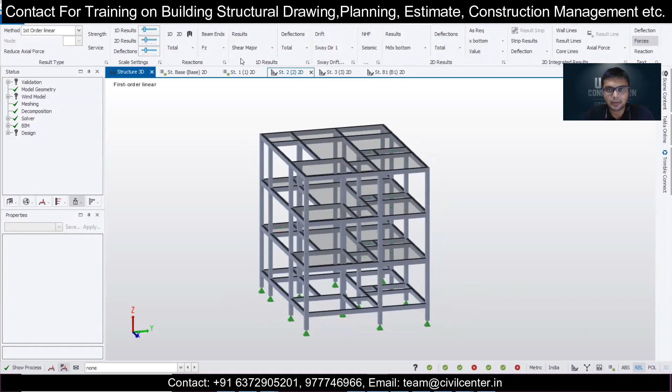So first of all, I'll just share my screen and show you this model in the Tekla Structural Designer software. We need to go here to the results view, and after going to the results view, we'll turn on the results and take any load combination or loads. So I'll just take a simple load combination of dead loads and live loads, let's say. And after taking that, you can turn on the shear and also the moment.

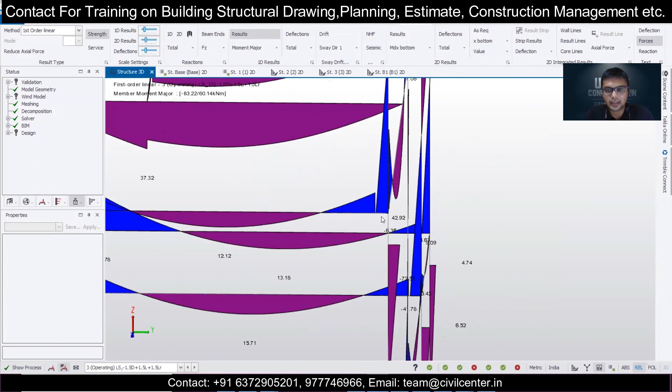So I'll go for the moment here. Let's see how the moment is acting on the beams. If you have studied the moment diagram for beams, you have also seen something similar. As you can see, at the top, the maximum moment is at the junction of the beam and columns, and it is a little bit more at the continuous end and a little bit less here, at the discontinuous end.

At the discontinuous end, the moment is a little bit less, and at the continuous end it is a little bit more in comparison. But overall, in general terms, you can say that in the top fiber of the beam, the moment is more near the supports, and in the bottom fiber of the beam, the moment is more at the center.

So before going deeper into that, we'll just learn some very simple logic for the lapping and give a very brief overview. Suppose the beam goes like this, and we have a few columns here. The bottom rebars of the beam will go like this, with a cover of at least 25 mm provided in beams, and the top reinforcement will go like this.

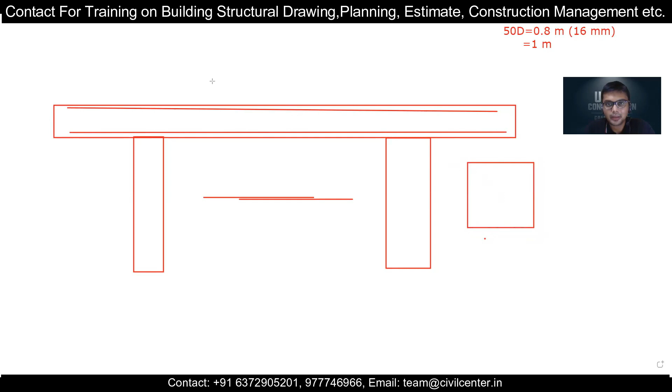So this is done in the columns, but in the case of your beams, we provide it like this. So this length is provided. Where to provide this? Let's discuss the top portion first, and before that, let me discuss the cross section. If you see the cross section, there are minimum 4 bars in a beam. There can be more. If we represent these 4 bars in this cross section, after the cover, it will be like this, and like this. I should have drawn the stirrups first.

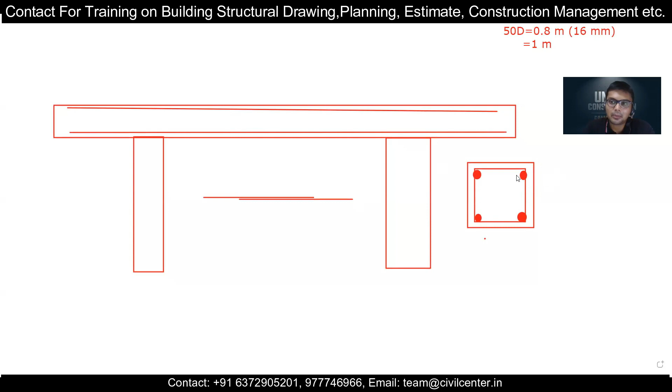So there are the stirrups like this. There is a stirrup like this, and there are the remaining components like this. This is the arrangement of the main reinforcement in our beams. If you have 4 number of reinforcement, 2 at the top and 2 at the bottom, the zone for your bars at the top, the bending moment diagram, which you have seen in this software, will tell you.

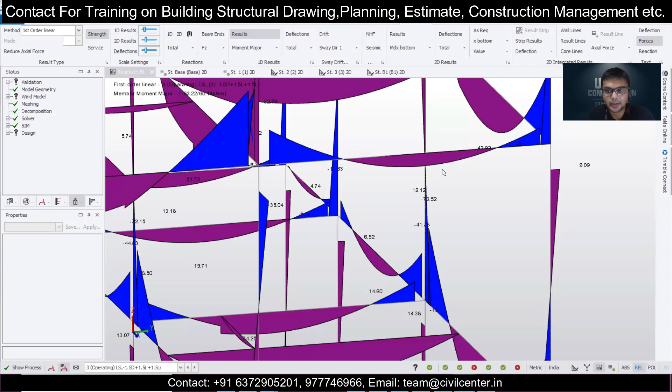I will just show you the screen. You can see here, this is the bending moment diagram. You can also see it from the load analysis view: right click and open the load analysis. You can see the entire bending moment diagram like this. Definitely it won't be at this end, it can be at this end.

In this span of L by 3, you can't provide the lapping. Lapping you can provide in this particular span. So here we mark it. This is the zone for the top reinforcement in which you can provide the lapping. If you have 4 bars, 2 bars lapping you can give here, and 2 bars you can give in the next span. Suppose this is the column, beam, and the next span ends here; the remaining 2 bars you can give in this portion. So you will have the staggered arrangement.

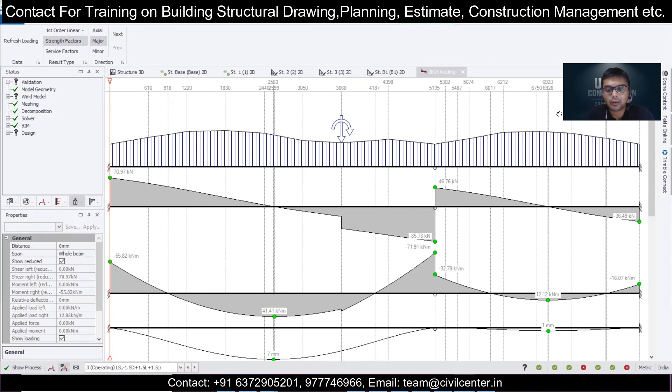So we shouldn't provide any lapping in the L by 2 region, because this is the most susceptible to moments. So we'll avoid this region. So how to avoid this region? The logical answer would be to provide the lap in this L by 4 region and in this L by 4 region. But let's take a practical example of why I'm not suggesting to put it here.

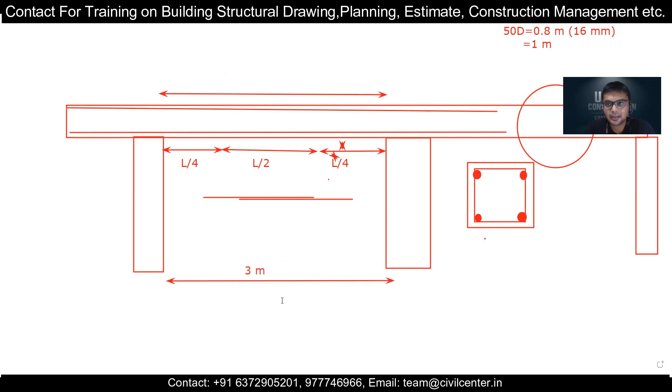Suppose we have a span of, let's say, 3 meters. We are using 16 mm dia bars. So let's see what L by 4 is here. L by 4 is equal to L divided by 4. I'm taking 3 meters as a general span; 3 meters is approximately 10 feet, a general span present in buildings. It can be more also. So L by 4 is equal to 3 by 4. It becomes 0.75.

So if this is 0.75, and I have to provide the lapping in this zone using 16 mm dia bars, how will I provide it in this zone of L by 4? Not possible. It will shift to the zone of L by 2. Similarly, if it is a 20 mm bar, we also cannot provide it in this zone. So in those cases, it is best that we provide the lapping for the bottom bars in this region, starting from the column and beam junction.

So lapping here will end up to this particular zone. If this is 1 meter, then we'll get an additional at least 250 mm here, and this 250 mm will cover the total length deficit. So for the bottom zone, we can provide lapping here and also here, starting from the beam and column junction up to L by 4. For the bottom fiber of the beam, as you can see from the cross section, the moment is less in this zone, so we can provide lapping at those places.

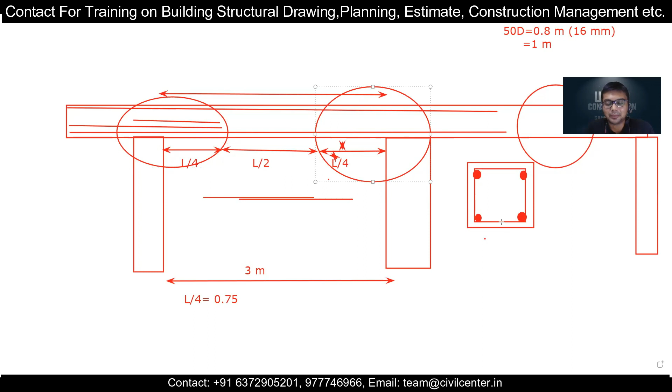So these are some common mistakes many people make at the site. As civil engineers, it's our responsibility to provide all this lapping correctly. You can also check out my video on the lapping zone of columns. The lapping zone of beams is very important, because once the structural engineer designs, the duty of the site engineer is to check those drawings and execute them properly. If it's not done, we won't achieve full success of the building. Hope this tip helps you in interviews and when you execute your works at the site.